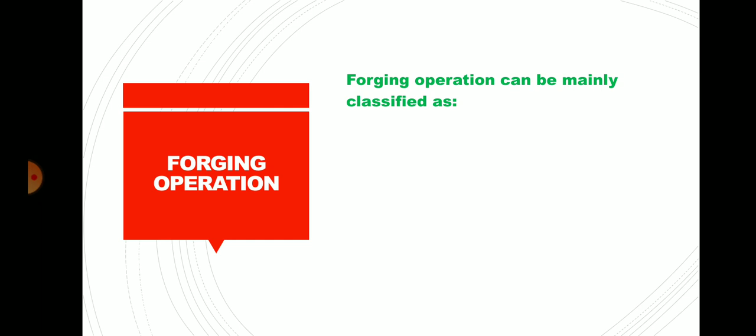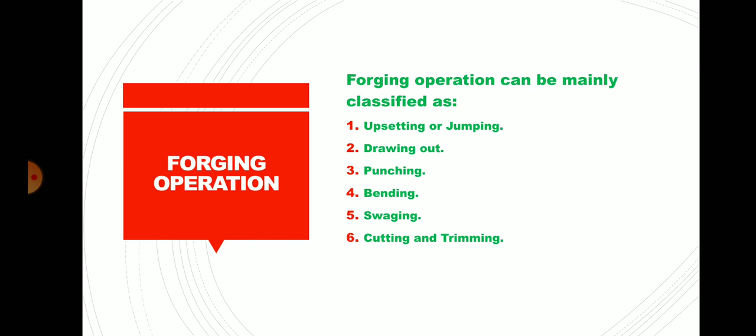Forging operation can be mainly classified as upsetting or jumping, drawing out, punching, bending, swaging, cutting and trimming, and forge welding. Let us discuss briefly.

The first operation is upsetting or jumping. As shown in figure, one end of the workpiece is held and the other end is hammered to get different types of shape, either holding it at center or at end.

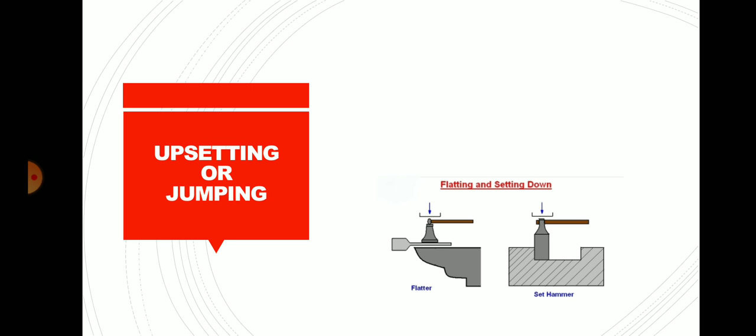In the upsetting operation, the heated rod is held on an anvil or a swage block and hammered. Upsetting can occur on rods of smaller or larger length as shown in figure. During the operation, the length of the rod is reduced while the thickness or width is increased.

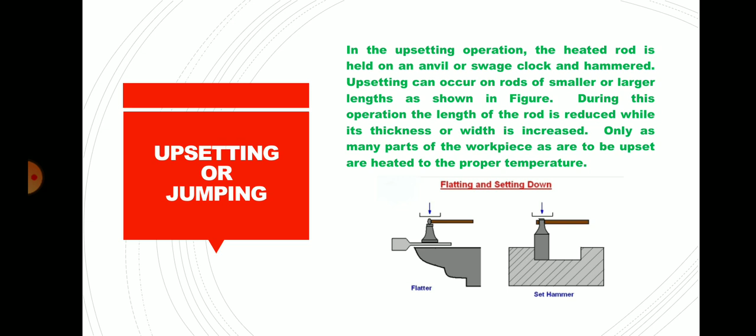Only as many parts of the workpiece as are to be upset are heated to a proper temperature. Proper temperature is required for this operation.

The next one is drawing out. We all know about the drawing operation. It is the process of making a wire from an object by pulling it, or in this process we have to hammer it to reduce its thickness and increase its length.

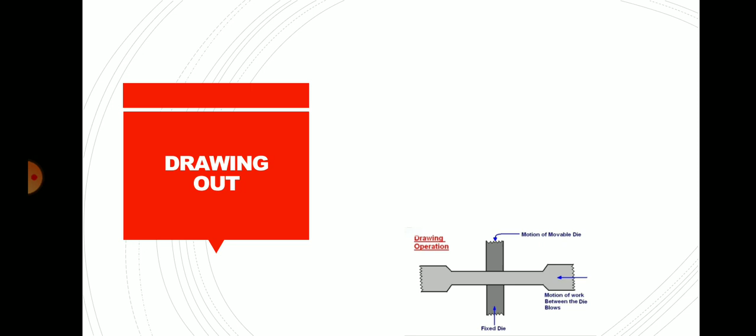This type of process is known as drawing out, also known as drawing down. This is an operation of nature as opposed to upsetting. In upsetting we decrease the length; in this process we have to increase the length.

The thickness or width of the workpiece is reduced and length is increased as shown in figure. In this process, the workpiece is heated to a suitable temperature and pressed with a peen hammer, swage or fuller.

The workpiece is heated at a plastic range temperature to a certain length on which the operation is to be performed, so as to increase the length.

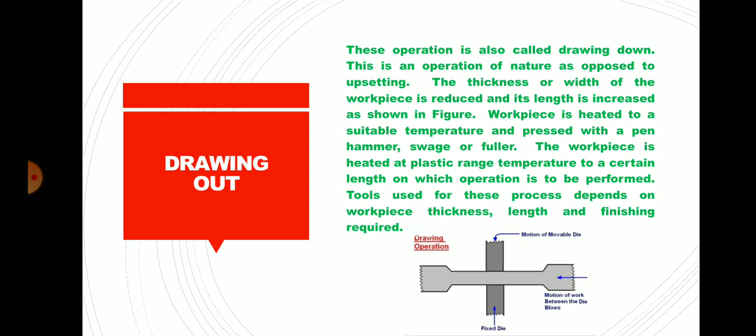Tools used for this process depend on workpiece thickness, length and finishing required. As discussed, different types of tools like peen hammer, swage or fuller are used depending on the workpiece thickness, length and finishing.

The next process is punching. We all know about punching, like punching a file page. Removing unnecessary material from the page or workpiece is known as punching. Here is a figure of punching for which we have to remove unnecessary material.

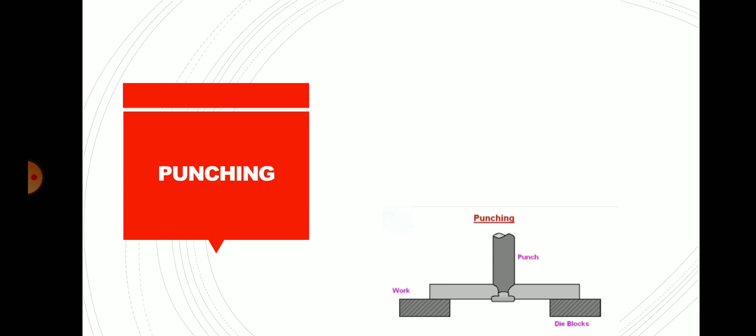If the thickness of the page or workpiece is more, then the operation can be done on both sides. This action is also known as drifting.

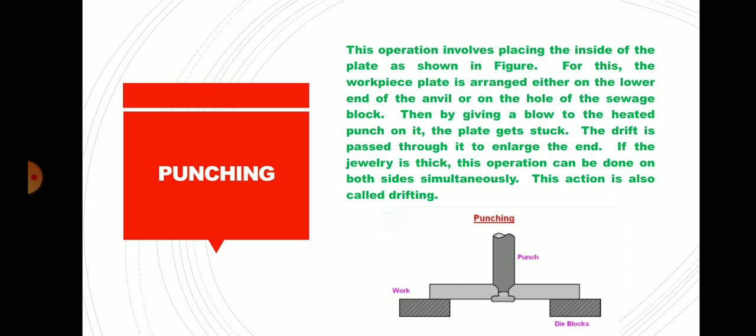The next operation is bending. We all know about bending. When the workpiece bar is shaped differently, either angular, curvilinear or circular, such a process is known as bending. We bend it with a pipe, with a hammer, or with a machine.

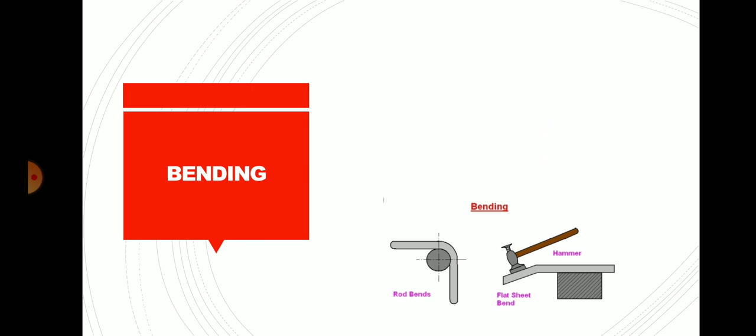Bending operation can also be performed by inserting a hot rod into a hole in the anvil or swage block and applying pressure with the drift.

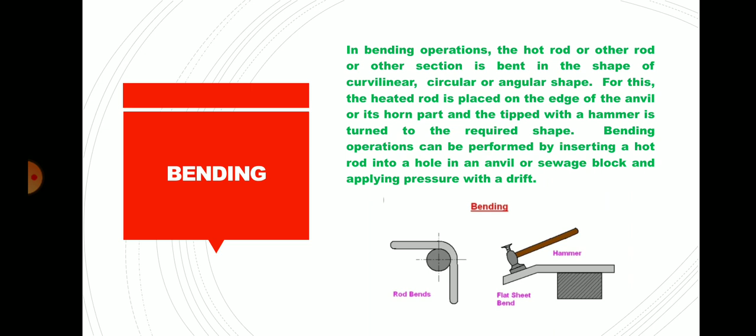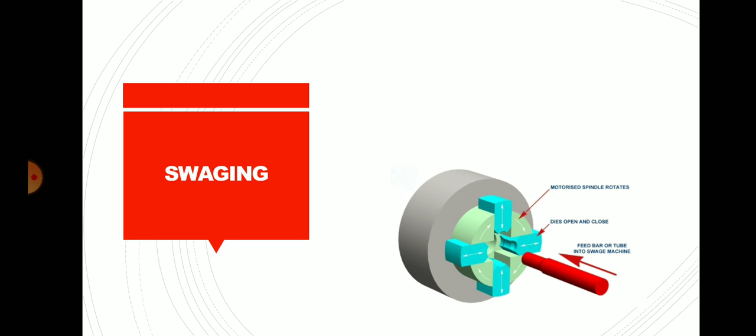Swaging is a process of pressuring the workpiece from all sides, like circular objects being pressed from all sides. This type of process is known as swaging operation, mainly used for square or circular jobs.

This is an operation similar to drawing out. Also in this process, length is increased and thickness is decreased.

This involves placing the heated metal block on the anvil with the help of a top filler and a hammer to make the necessary change in the cross section of the metal. These operations also reshape the metal using a two-part die as shown in figure.

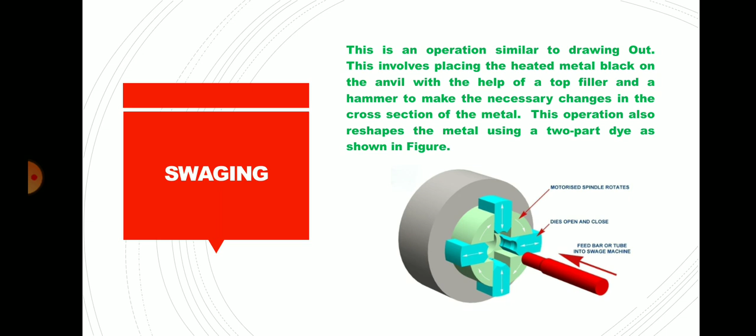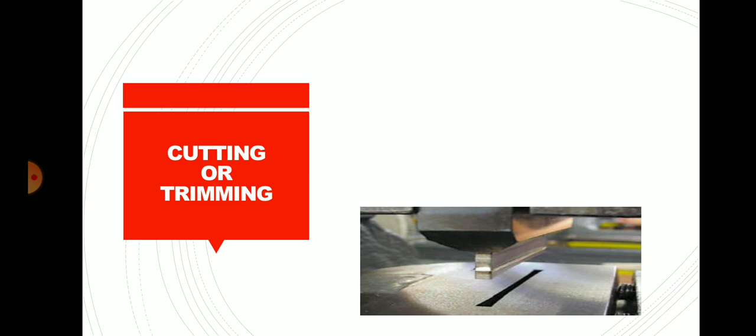Next operation is cutting or trimming. If you want to cut the material with the help of forging, this type of process is known as cutting or trimming. The cutting operation used in forging process is done to cut the workpiece or jewelry to the required length.

The operation of cutting is also used to cut the excess material that has come out while preparing the forging. Excess length of the heated forging should be removed with the help of a chisel or cutting tool and hammer. The trimming die is used to remove excess metal of the forged form in mass production.

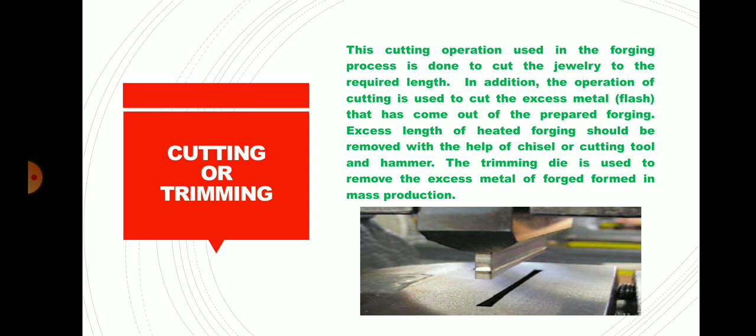The last one is forge welding. By hitting the two ends of the workpiece and pressing them, both ends of the bar are joined. This type of process is known as forge welding.

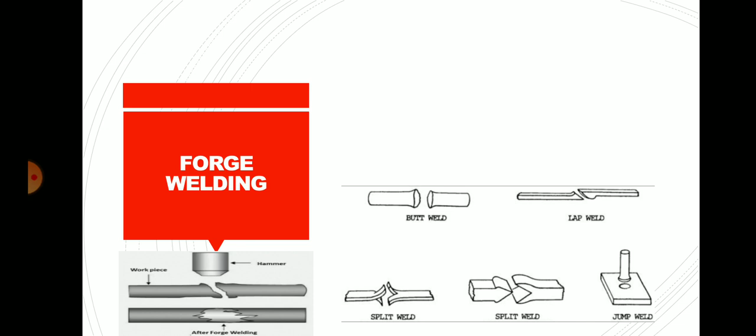We can make different types of butt weld, lap weld, split weld, and jump weld with the help of forge welding. This type of preparation is required for forge welding.

If the edges of two pieces of metal are heated and pressed together, the process of joining the two pieces together is called forge welding, as we told in our definition.

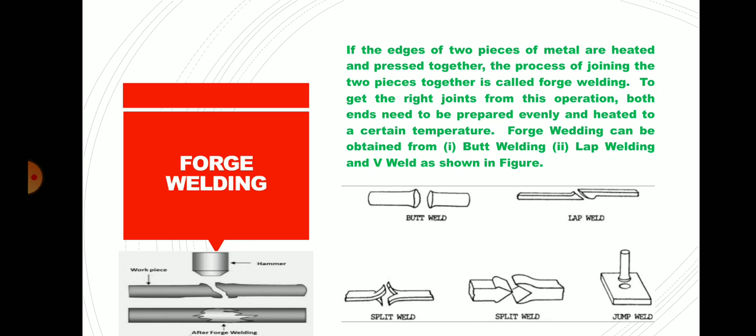To get a proper joint from the operation, both ends need to be prepared evenly and heated to a certain temperature, as discussed. Forge welding can be obtained through butt welding, as seen in figure, along with lap welding and V-shape welding.